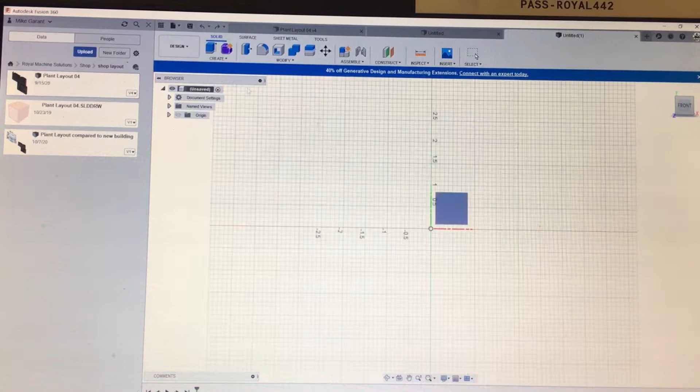We're going to look at designing a hanger for RMS tools. Under Create Sketch, this is going to allow you to select this. I'm clicking the Orbit button right now on the mouse, and I'm going to select this plane to draw on.

Let's create a rectangle right here. This is a center point rectangle. I'm going to click the center of the origin, make it bigger, hit D for dimension, and put a dimension on it. Let's say we want it 15 inches long, enter. This is 6 inches, press enter.

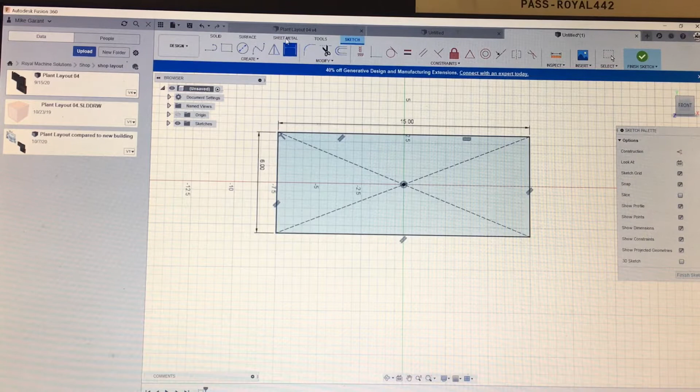We'll make a sheet metal component. Click sheet metal, create flange, select this as the flange. Here you can select different thicknesses of material, but generally if you're bending 14 gauge or 10 gauge, this is fine, because if you zoom in here, you can highlight this and press I for inspect, and it's 100 thou right here, you can see.

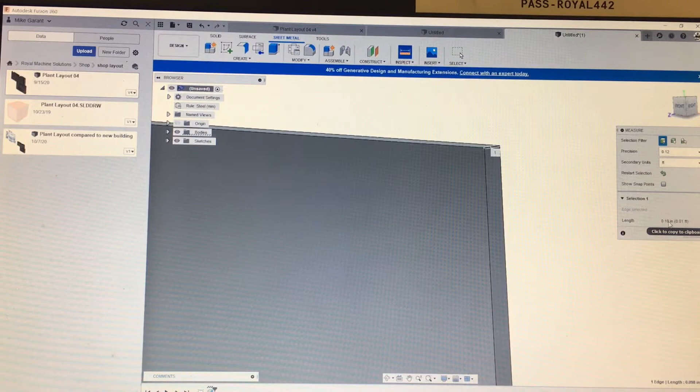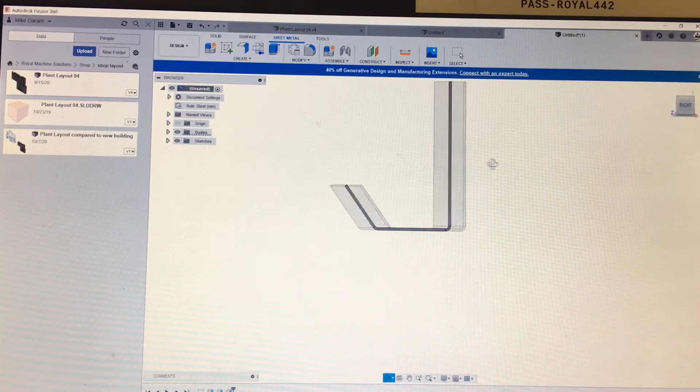So let's zoom out here. We're going to create another flange. Select this. I want it to come out 3 inches. Okay, create another flange. Going to select this. I want it to come up, let's say 2 inches. And let's say I want it to be a bit on an angle here. There we go. Now let's get to the hanging part.

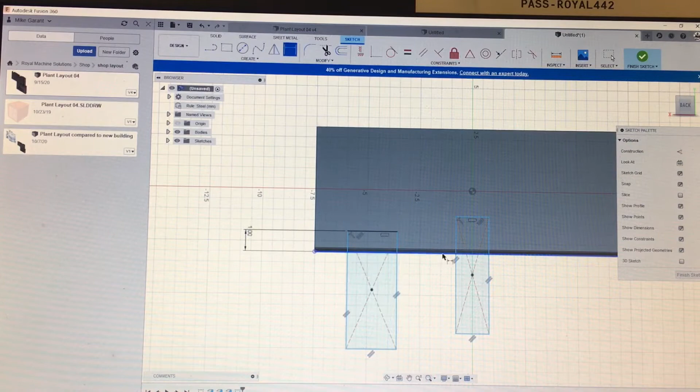Going to hit R for a rectangle, and I'm going to click on the plane at which I want to sketch on. So I'm going to click on the back here, and hit the center point rectangle again. Right here, let's say this is 1 inch. Say this is 1.5. Enter. Let's say from here to here we want 2.5 inches.

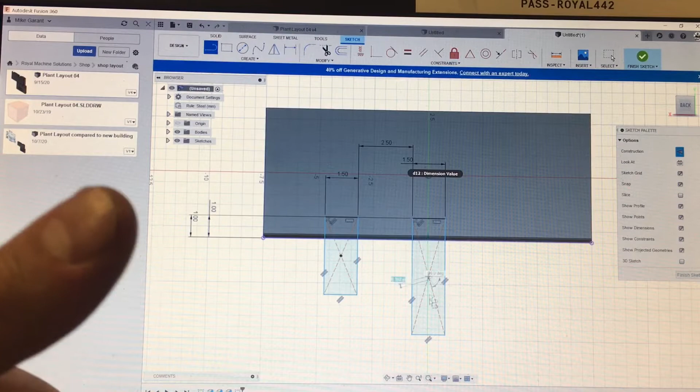I'm going to hit L for line, and I'm going to hit X, and that's going to create a construction line. This line won't hold any geometry here. You can see this when it's blue. You see what's happening is these float around. So what we need to do is snap this to this, and I'm hitting midpoint. So you see now it turned black.

So the only thing that hasn't been adjusted is the dimension of the length. I'm going to hit here to here. The length is irrelevant, and you'll see why. With that line, I'm going to hit SMIR for mirror. Click this mirror button. I want to mirror this component on this selected line. Hit OK. E for extrude.

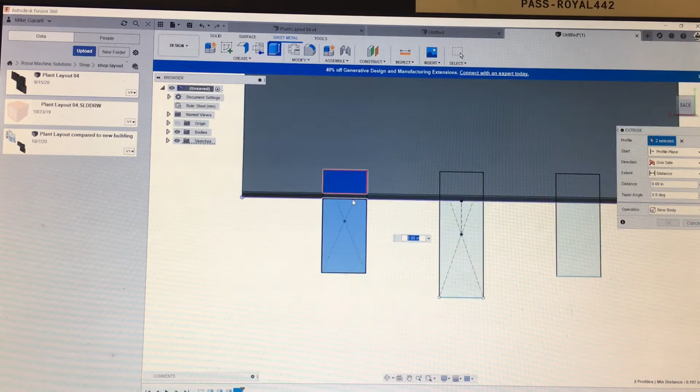And these are all the parts I'm going to extrude. Cut this through here. Now you can see it didn't cut all the way up here, and we'll look at fixing this, because I want to cut this all the way through. Press OK. And you can do this a few ways.

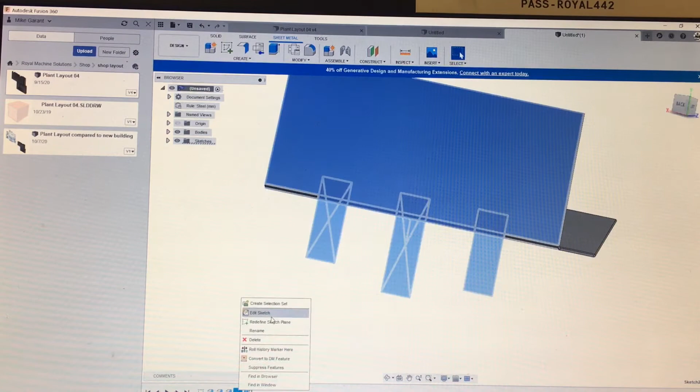Right down here is your timeline. I can go back to this and click Edit Sketch, and I can change this to 2 inches, and this to 2 inches. Finish sketch, and there you go, it cut them all out.

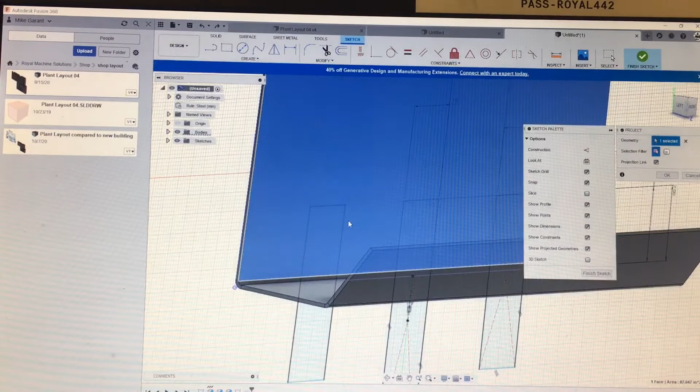But I don't really like that. I don't like the fact that it's cut out on the back so much, so I'm going to hit Control Z. I'm going to hit P for project, select this face, hit enter, and I'm going to project this drawing onto the face in front. And then I'm going to delete this.

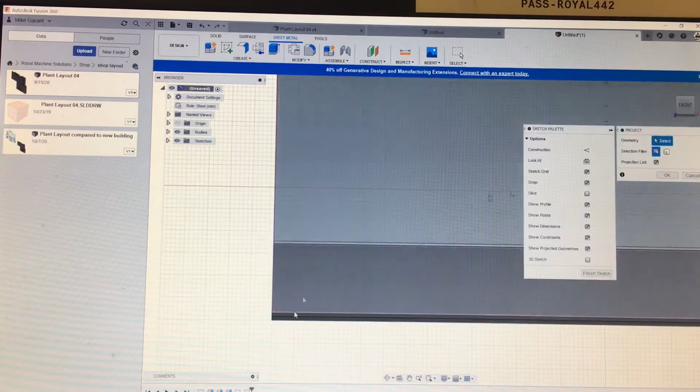Actually, I need to do this again. Hit P for project, hit this. I gotta come in here and turn these sketches back. So now you can see I turned the sketch back visibly, and I'm going to turn this on, and I'm double clicking it to project the geometry there. Now I'm going to hit E for extrude.

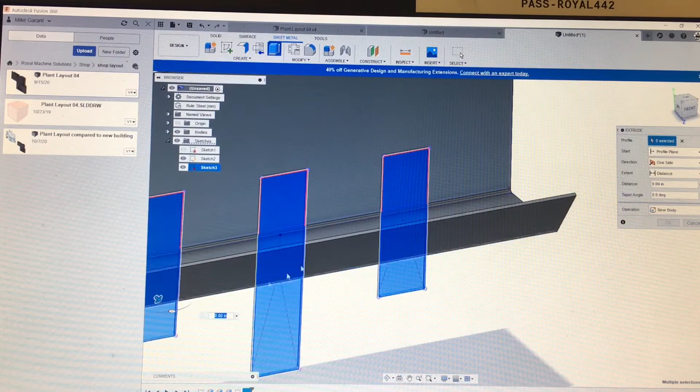And now pull this through, turn off the sketch. There we go. I like that better.

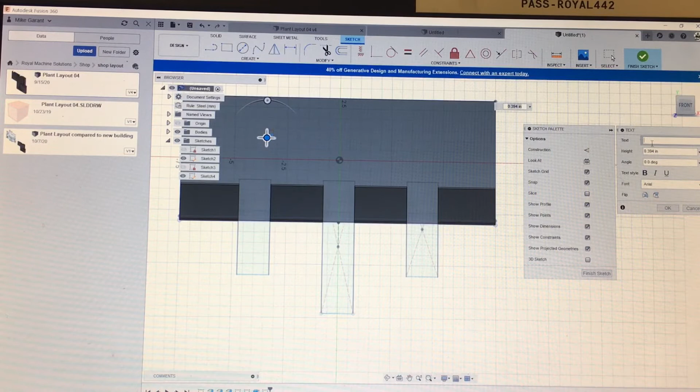Now what I'd look at doing, let's put a label on this. I'm going to come in here, create sketch, hit the face that you want to sketch on, and I want to put text on this. So let's put, in our text box, let's put 'tools.' Make it 3 inches tall.

Change our font to the RMS font, Ethnocentric REG. Grab this, center it. Let's change this to 2.5. Okay, okay. Hit E for extrude.

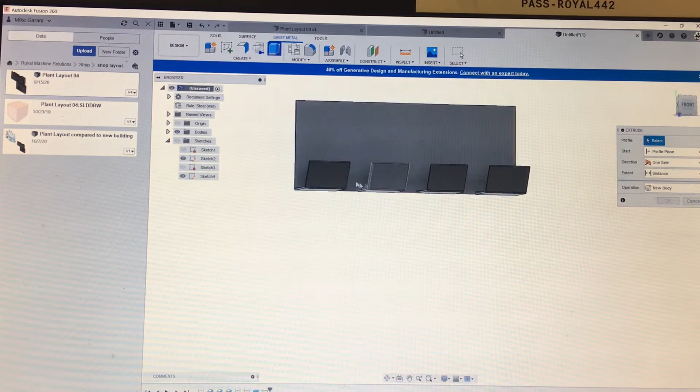You see it disappeared there? I gotta turn that back on. Okay, there we go. Now you can see if I cut this out, the O's are going to fall off. So let's go back in.

I'm going to hit R for rectangle again, and I need to make some rectangles here to hold these O's on. Now I'm going to hit E for extrude.

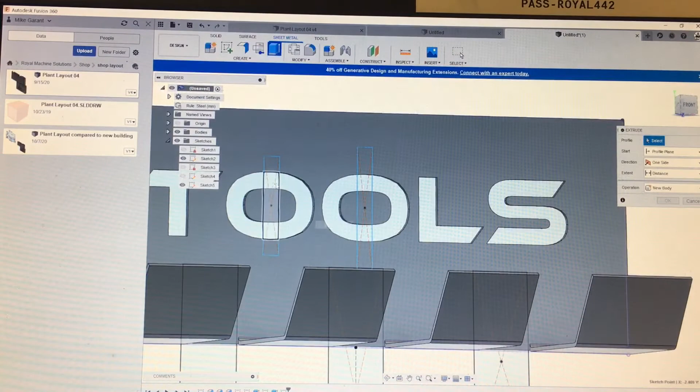And what we don't want, what we've been doing is cutting. What we want to do is join. And I'm going to bring it out this way. But you can see it's bringing out a block. Usually what's best if you go to the extent and to object and click the other side there. So it's created that extrusion.

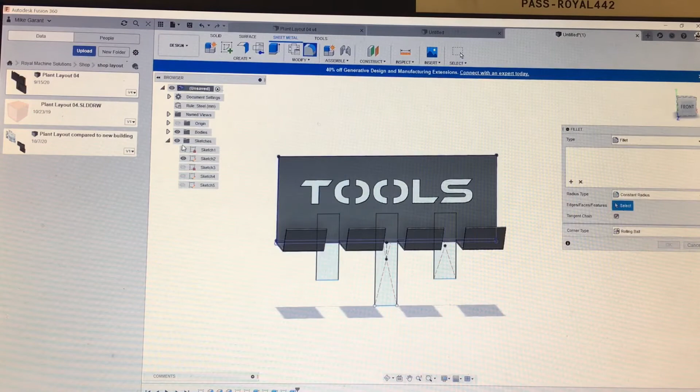Now let's hit F for fillet. I'll turn the sketches off, and let's go around and just clean these edges up.

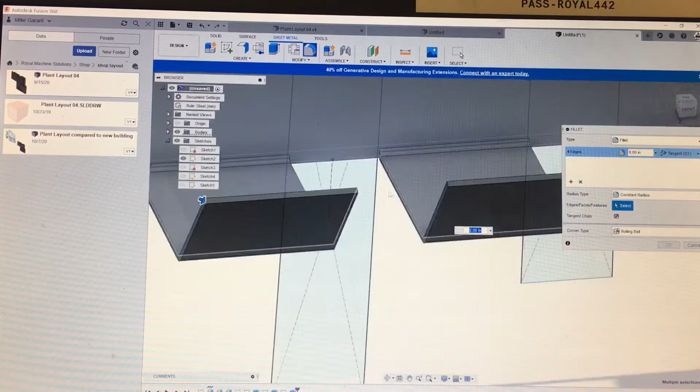I had to press escape there, it selected too much. So I hit F for fillet again. If you double tap it, sometimes it unhighlights it, but it helps to zoom in to click the right geometry. This is just going to make it look a little bit better.

It's best to click all the ones you want to be the same fillet at the same time, because you can adjust it and see it updating live. Let's say here we're going to do a 1/2 inch fillet.

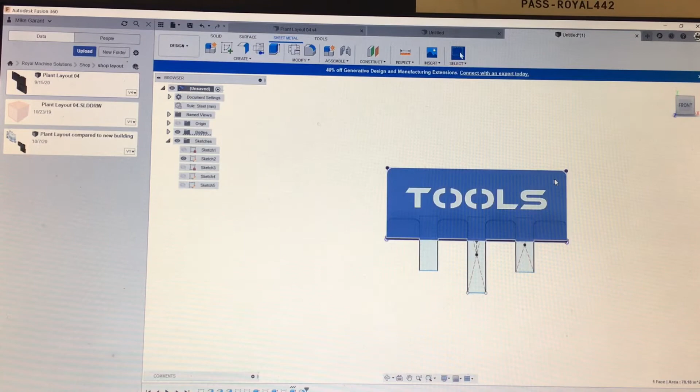So now I want to hit P for project. Actually, escape that, Control Z is undo. I want to hit L for line on this front face, P for project. I'm going to do the square thing. Going to hit O for offset, because I'm going to put holes in.

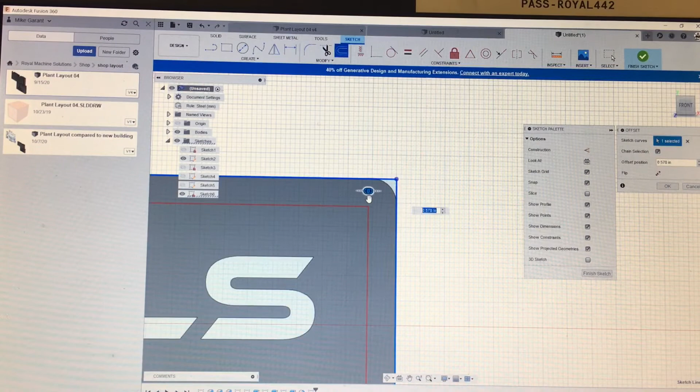Right there. Now I'm going to double click this line and click X, that's going to create the construction geometry. Hit C for circle. You see the triangle that appears there? That's a midpoint.

Going to hit D for dimension, make this 0.2. And I'm going to hit this equal button, so this is equal to this, is equal to this.

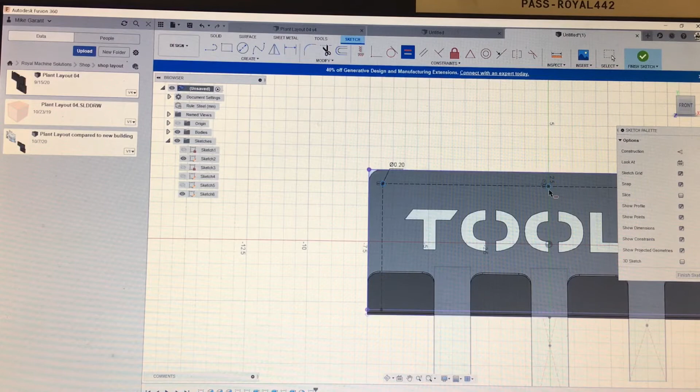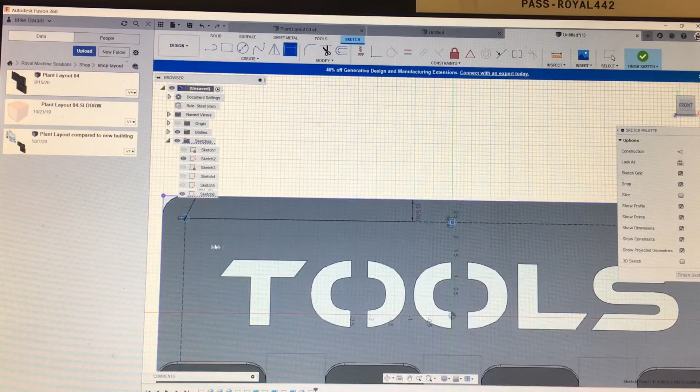But you ask, why is this still blue? Why are these circles still blue? Well, they're still blue because it's non-constrained. So I'm sure if you hit D for dimension here, there's something that's non-constrained, you see it's just floating. So that's not really great. Sometimes it's best to hit D for dimension and try to constrain this so it doesn't float around. But you can see it's not.

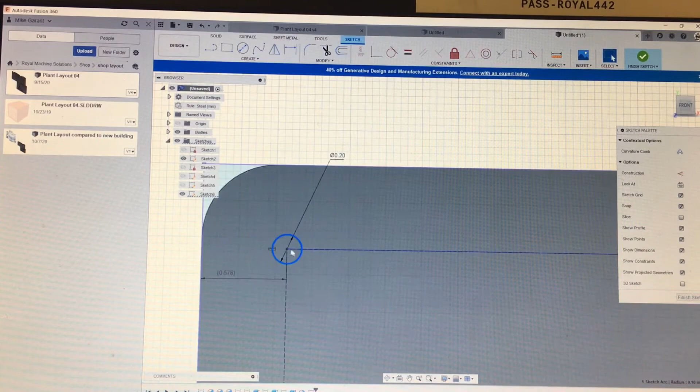When the dimension's in brackets, that's an odd one, I don't quite understand this. Dimensions in brackets means it's over constrained, but I don't understand why this is—it's like it's constrained but it's not. It might be an error with Fusion.

Now I'm just going to hit E for extrude, I'm just going to cut these holes. Okay, there we go, we'll turn our sketch off, there's our tool rack.

Now to make a flat pattern, you press create flat pattern. Oh, and this is a good issue, it didn't do it, and I'll explain why. Finish flat pattern—I bet you the reason why it didn't do that is because of this, it's cutting it at a weird point.

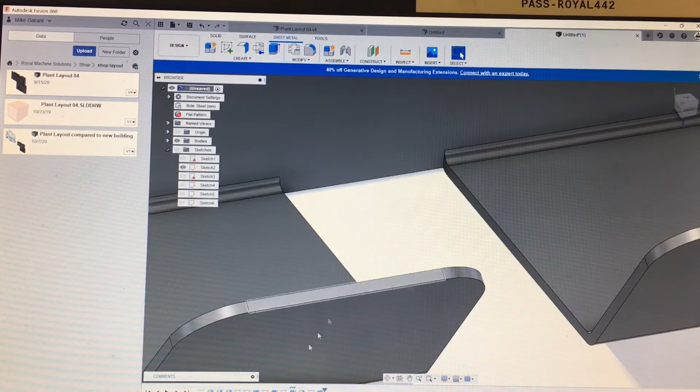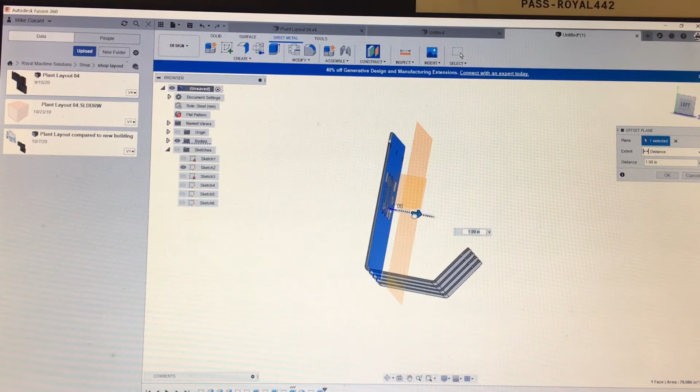So what I'm going to go and do—edit feature. Oh no, that's the wrong one. I'm going to go back in the timeline and try to adjust this, because I almost need to go to construct a plane, pull it out maybe say 1 inch, press OK. I'm going to delete this.

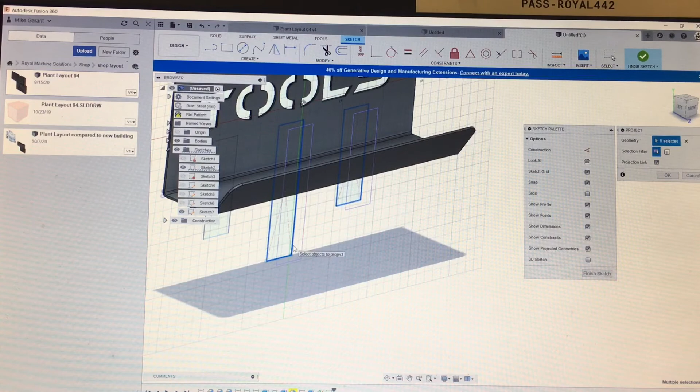Going to turn my sketches back on, hit P for project on this construction plane, and I want to project these squares. Enter, hit E for extrude.

Okay, so that's that. Now you can see here, this fillet tool is yellow. It means because the geometry's been deleted, there's an error with the flat pattern. So let's just quickly see if we can make this a flat pattern. Okay, so that's the flat pattern, so that's what it was. Control Z will exit out of this.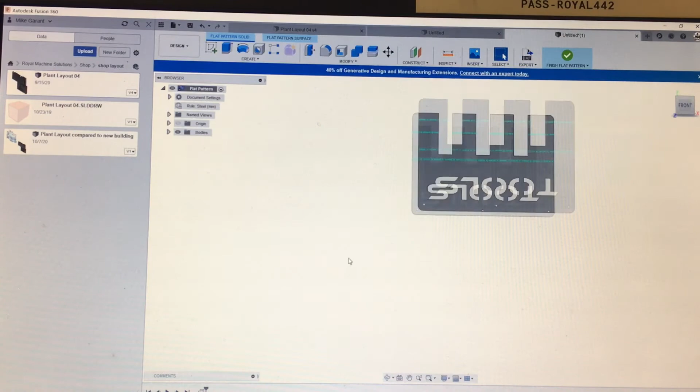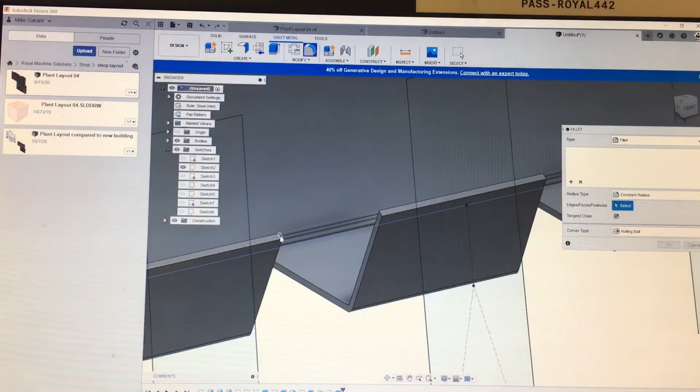So what we need to do, I need to finish flat pattern. What we need to do is go back into this, edit feature, and we need to continue that. So I just need to hit F for fillet and just finish these off. But that's what happens when you go back in the timeline to delete things. And we were at 0.5.

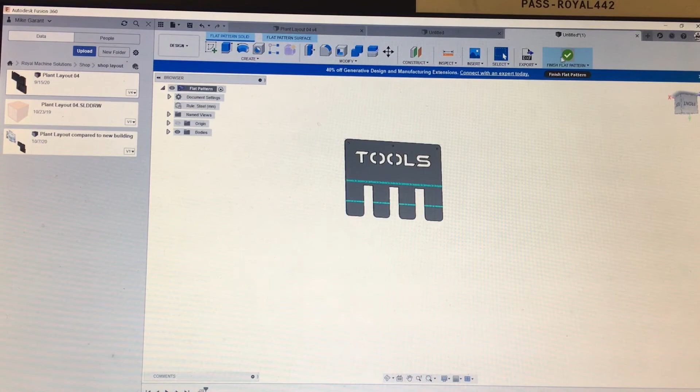Okay, turn our sketches off. Check the flat pattern, right here—here's our flat pattern, finished flat pattern. You need to export this. Press OK, you save this as tools.

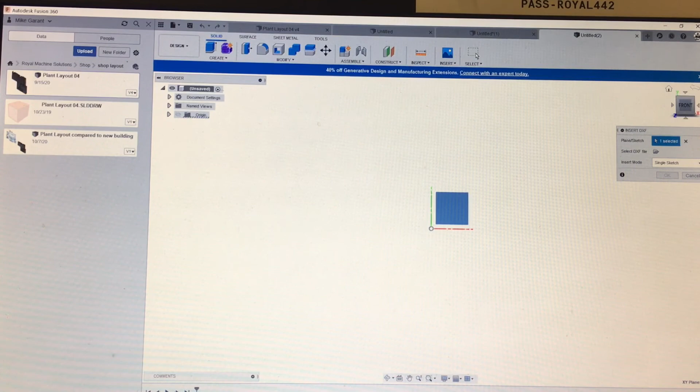Save. Then you go into a new drawing. This is when you want to get into cutting it open, cutting it up with Fusion. Insert, DXF. It's best to always insert this the way the plasma cutter is—you can see the Z-axis is facing towards us, the Y and the X, if you're plasma cutting it or water jetting it.

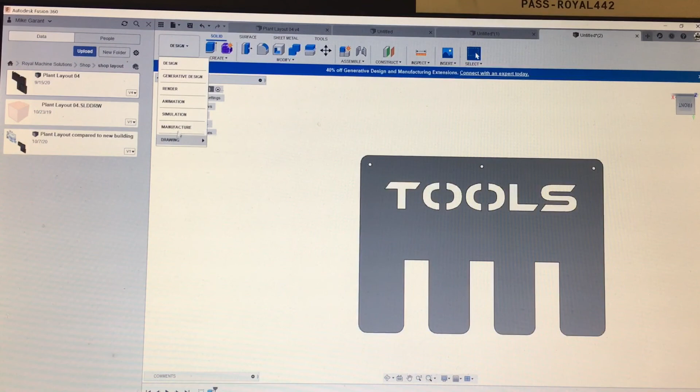Insert this, press OK. It uploads it, press OK. We don't need to show the interior profiles, we don't need to show the bend lines. So press OK. Hit E for extrude, 0.1, enter. Right here, now you can cut it. So you go to manufacture, and from here you can follow the plasma cutter video.